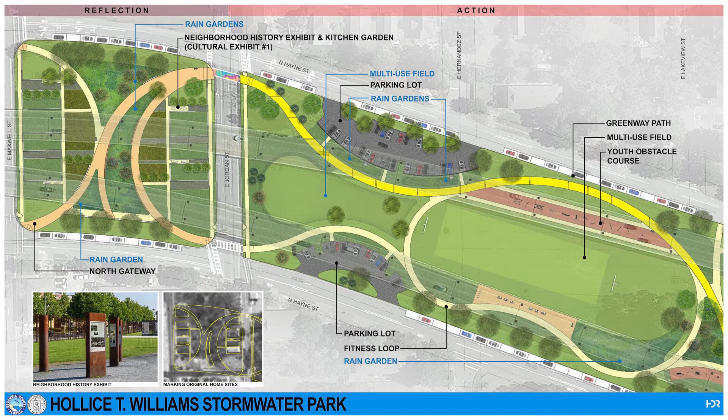And this intersects with the action segment of the park, which also happens to be the largest, if you would like to start talking about that. Yeah, so the action section of the park, just to give a little background, was probably the most heavily utilized piece of the park. It's open field space. You'll notice the football field goals that are located in that area. The Maggie Field Rattlers actually utilize that space for football practices. They don't play there, but they do practice there. And so there could be as many as 200 kids during football season in that area.

Along with 200 kids comes parents, comes siblings, a lot of people needing something to do. So first off, we wanted to keep with the theme of that area and consider the fact that these multi-use fields are needed. So we included several locations for multi-use fields.

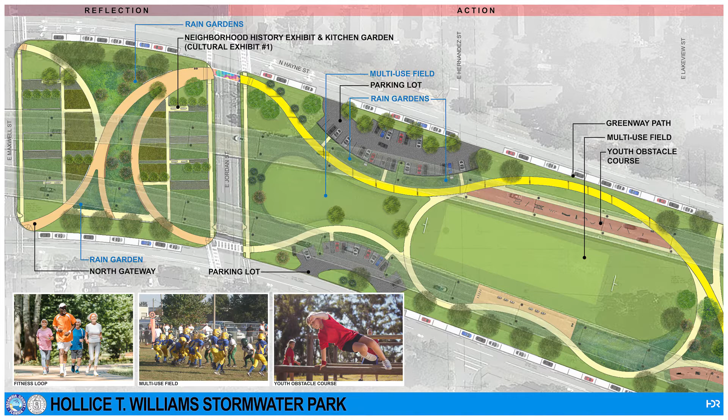Now to give the others something to do, we've included a fitness loop that goes around the largest of those fields, as well as a youth obstacle course, again, to give the younger siblings something to do.

As we continue on to the south, you'll see that we also included a brand new state-of-the-art playground. That playground will feature a landmark pelican play structure, as well as restrooms, and then there's also a fitness circuit area, again to give the older kids something to do.

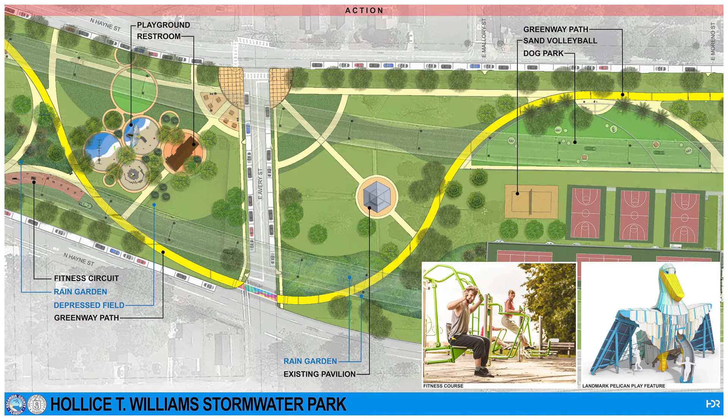So we really tried to think about all the needs for that space, considering how it's used now.

And as we continue on to the south, the existing pavilion will remain as it is now. And then we did add a sand volleyball court to go along with the existing basketball courts, as well as the tennis courts that are there now.

You'll see a dog park that we've included adjacent to that space. It is a fenced dog park, and within the dog park, we've thought about the fact that you'll have large dogs and small dogs, so those areas are fenced off as well.

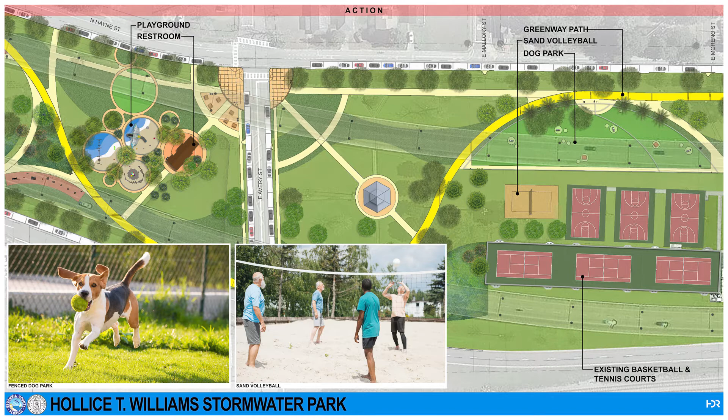Continuing on to the end of that section, you can see that we get into the pool parking lot area, and the existing swimming pool facility is actually being renovated right now as we speak. So you could even say we're kind of getting started.

That's really great. And now we have the connection area a little further south than that, which contains some very interesting features. There's a small skate spot, we have the amphitheater, and there's also the Overlook Pond, which happens to contain our second cultural exhibit.

Would you talk about that a little bit? Yeah, so the amphitheater block was probably the only block that had absolutely nothing on it through the park limits there. And this is located between the swimming pool facility and Loaves and Fishes.

There's a lot of grade across the site. So, again, this being a connection section, we thought there were a lot of ways to make that connection to the park, with bringing people together with an amphitheater. That amphitheater could be utilized by the neighborhood, or it could be utilized for larger events.

And then up above that amphitheater, you see that we've designed in a splash pad for all ages, as well as another restroom facility located nearby.

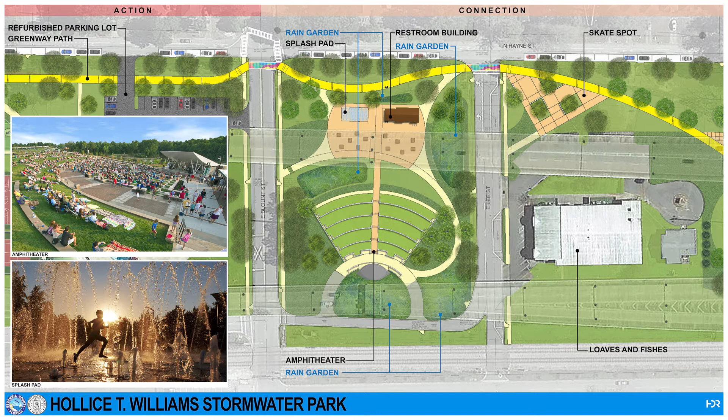So then continuing on into the connection space, you'll see the Overlook Plaza, which will include our second cultural exhibit. There's a lot of opportunity in that plaza to include sculptural art into some of the space.

And then the Overlook Pond itself is actually a multi-tiered pond, and the intent of the space is to be inviting, right? Mm-hmm.

Yeah, and so that Overlook Plaza pond appears to be really the most prominent stormwater treatment feature in the whole park. I'd like to dive into that a little bit more, if we could maybe talk about some of the other stormwater treatment features that are being featured in the park, how they kind of work, and maybe even some numbers to go along with that.

Yeah, so as you've kind of seen along the way, all the stormwater features within the park itself are labeled in blue. There are several rain gardens. Rain gardens are nice landscaped areas that are meant to peel off the stormwater runoff and treat it in shallow areas.

But this block, the Overlook Plaza and the pond associated with it, consists of about 9 acre-feet of capacity.

And what that will do is actually take stormwater runoff that's coming from Lloyd Street that basically goes into the DOT system and directly discharges into Pensacola Bay, and provides a place to treat that stormwater runoff to improve water quality. So this is the single biggest feature within the park limits.

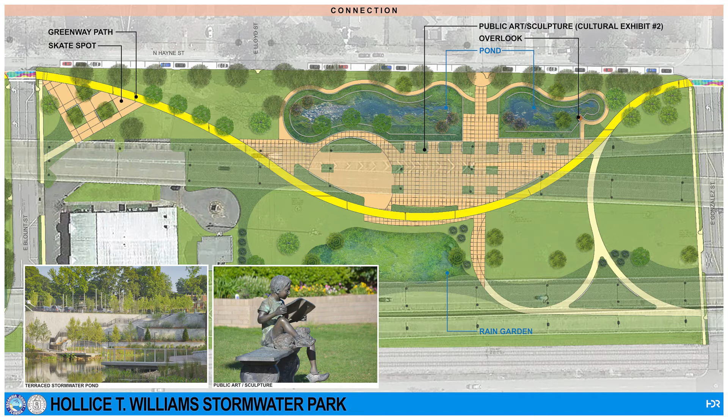It'll treat about 100 acres of runoff, as well as provide some attenuation to the existing drainage system. Attenuation being we slow down the rate at which water enters the environment downstream.

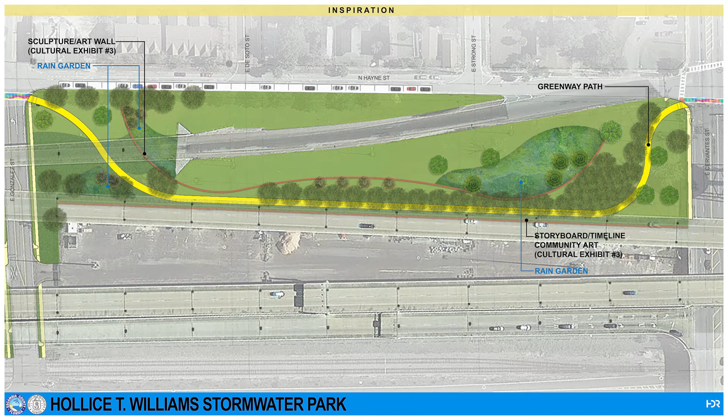So as we move down to this segment between Gonzalez and Cervantes, we get to the inspiration segment of the park. It contains a third cultural exhibit and also some really interesting art features. Once we got south of Gonzalez Street, in between the two interstate bridges, you have the city maintenance yard, and you only have about half of that block to work with. So what we wanted to do is create a tunnel corridor loaded with art, which is our third cultural exhibit.

One of those features is a low seating wall that can contain art, and then sculpture locations along those limits. And then to shield the city's maintenance yard, you could actually have plywood art panels, and that could be a storyboard timeline, or it could just be other community artists coming out. These panels are removable, so you could change it out from time to time.

And then as you approach Cervantes Street, again, that's a state road. We're working with the existing pedestrian crossing that's there now, and then we continue the 12-foot path along the side of the police station. Now we are approaching the southernmost area of the park, which is the integration phase.

And we have a ton of stuff going on there, including the last two of the cultural exhibits planned throughout the park. Some of it will actually be breaking ground soon, if you'd like to take the lead on that, Alan. Yeah, that's right, Madison.

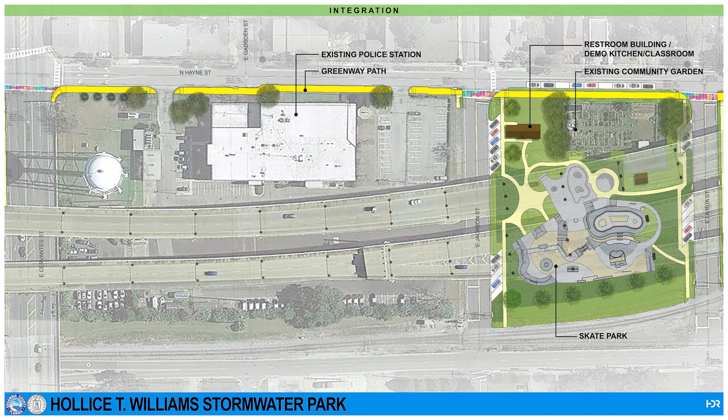So as we continued our path across Cervantes, again, we're left with another tight space, working our way around the existing police department. But we are able to widen that path out to 12 feet to keep a consistent path through the project limits. Then as we get south of Jackson Street, there's a lot of excitement over the skate park that's coming.

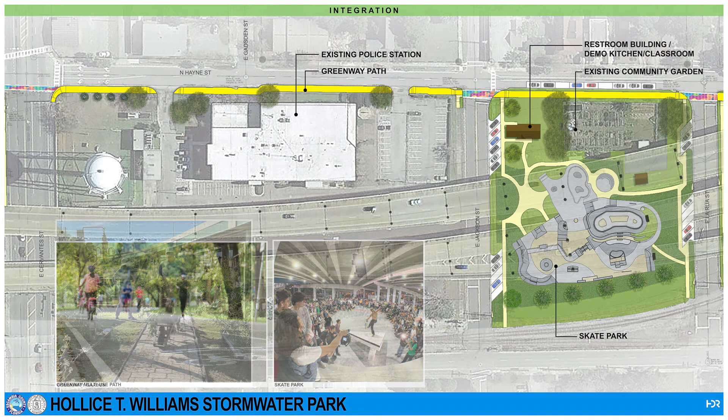It's actually expected to break ground August 2022 and take about a year to construct. But the remainder of that site is occupied by the existing community garden, who've been a great partner to work with in all this, along with the skating community. As we look around the edges of the park, this section will only include the skate park as of right now, but in the future we will supplement that with parking areas as well as an additional restroom facility.

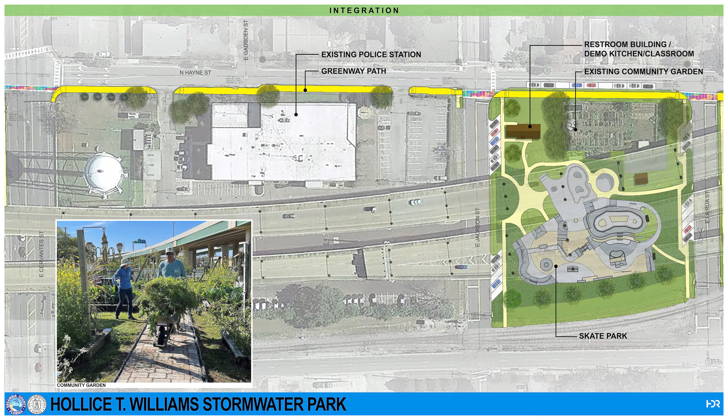Continuing to the south, we move into our fourth cultural exhibit, which is the Market Plaza. So you might be thinking, well, how is the Market Plaza a cultural exhibit? Well, it's interpretive. It's what we're putting within it. You can see the cross feature located in the Market Plaza. That's meant to represent the churches that were impacted through the limits of the project area when the interstate was built. That's something that we can memorialize in that space.

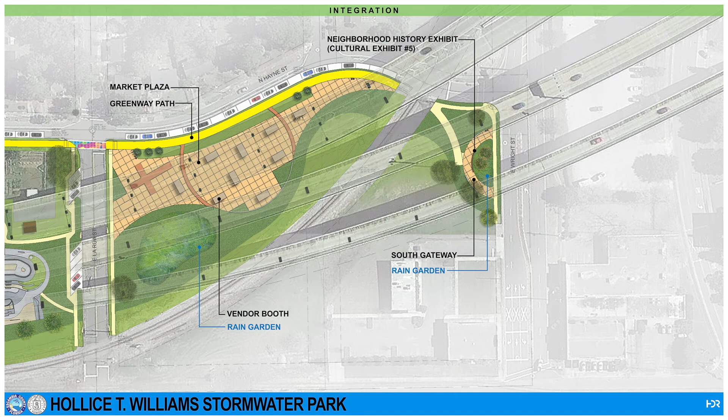And then the vendor booths in the Market Plaza are actually intended to replicate old rail cars. And the railroad was very important to the community during this time frame that the area was inhabited.

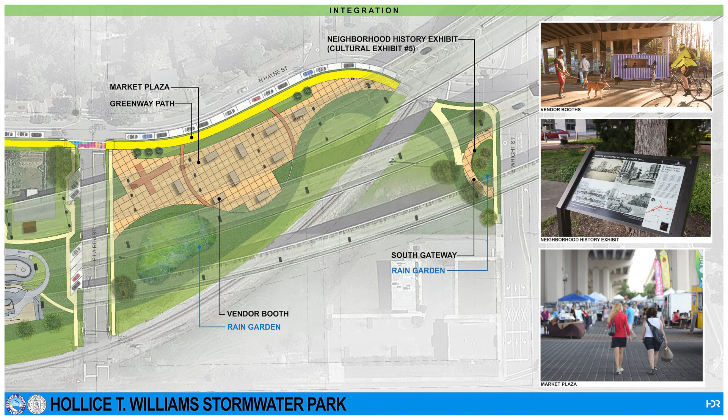And so then continuing across the existing railroad tracks, we enter into the South Gateway, which is our fifth cultural exhibit within the park limits. Again, we have another opportunity to recognize the neighborhood's history, especially with regards to the railroad track like we were talking about in the Market Plaza block. It's a place of reflection and a place to start your adventure through the Hollice T. Williams Park. All right, and that really brings us to the end of our walkthrough.